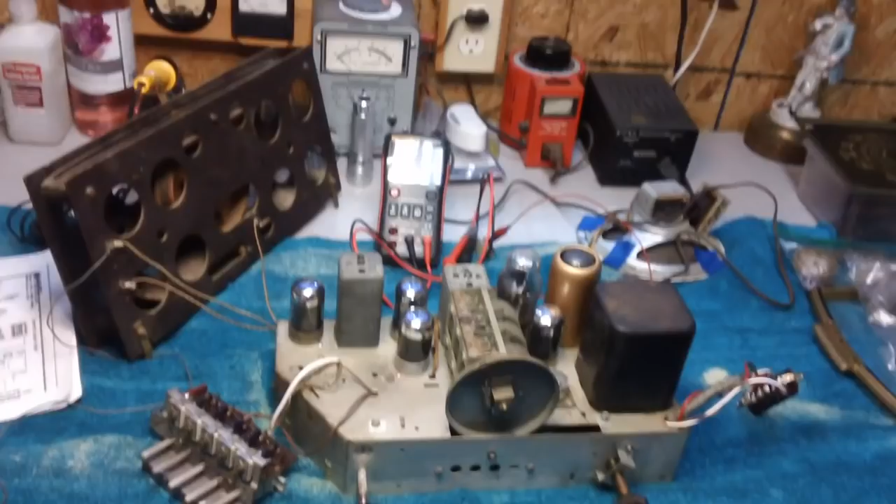Tell you what, just before we jump out into the garage, I'll give you a quick update on what's been going on with the Zenith. The radio does make sound now. It comes on. The problem is the sound is a motorboat, a mild to low motorboating. So after I get the axle out from under the Thunderbird, I'm going to take a few days and spend it strictly on the radio.

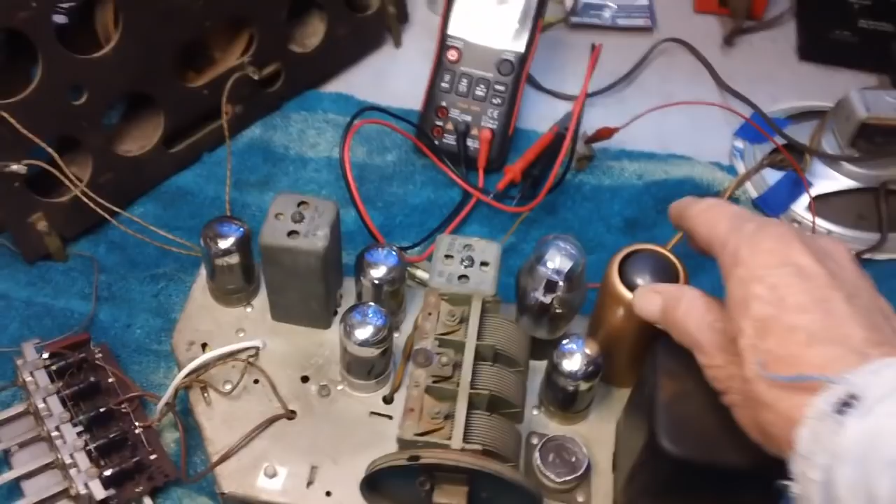This thing did not have an original Zenith tube shield, so I had to adapt one off of an Atwater Kent. Somebody would have mentioned that or caught that right away. Oh, that's not a Zenith. Yeah, well, I know these things, okay? Well, anyway, we're going to try to get this baby to make some really good sound before it's over.

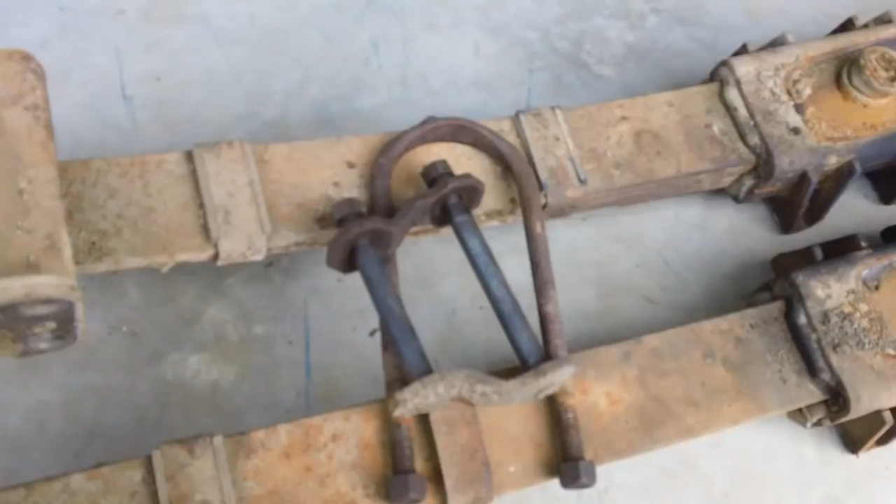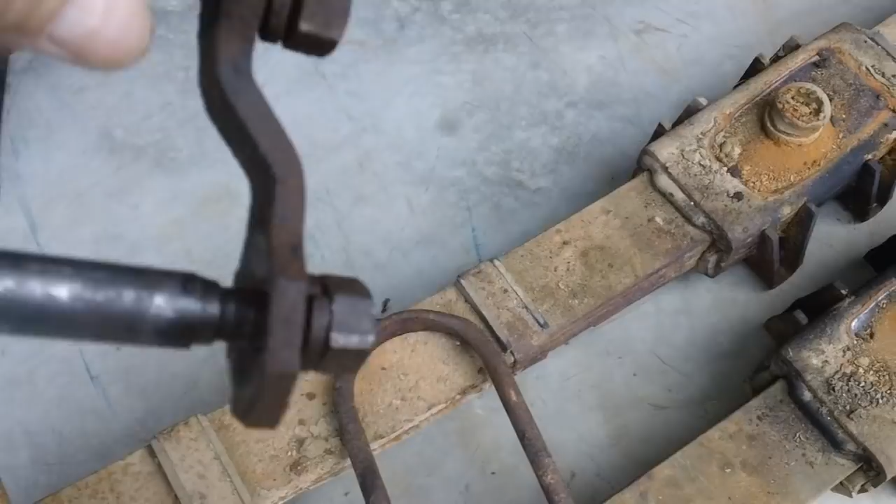A couple of more little items before we actually get going. This is the shackle that's on the rear, the very end of the leaf spring on the loop right there. One on each end of the car. And you'll notice that that thing is supposed to slip over there real nice and be floppy loose, that bar. Well, the other one's not quite like that. Let me show you. Here's the other one. Bent out. And I can't get the bar or the strap to go across.

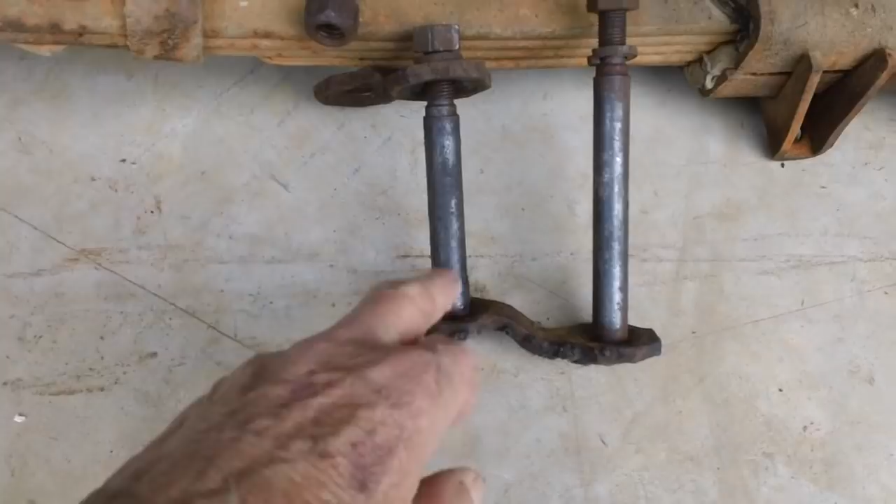So I'm going to have to take it into the shop where I used to work, ask one of our maintenance guys if he can put it in the vise and straighten it out. I don't think it'll take too much. I think it's nice and sturdy. I mean, there's no rust, no pitting, none of that other garbage on there. I don't think it's the bar. It might be. We'll have to determine that once I get it in there.

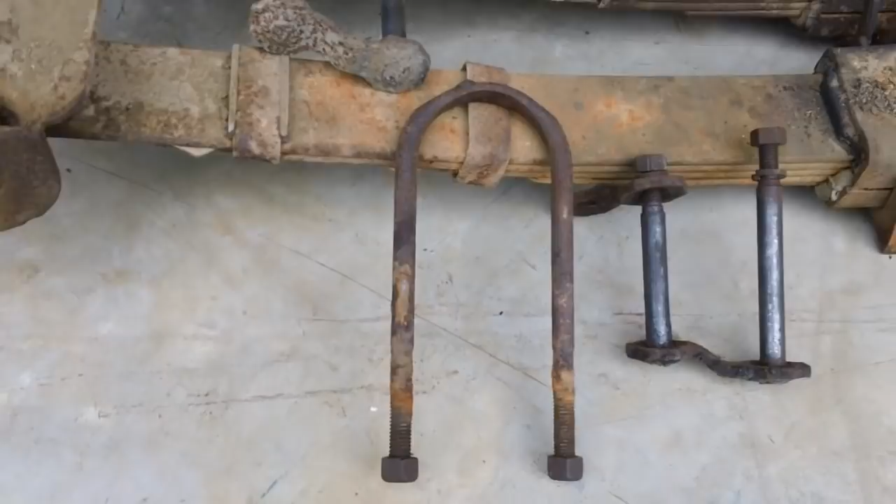Also, for you guys who have Thunderbirds, 1966s, this is the spring clip or the U-bolt. This is 8 inches from the bottom of the bolt up to the inside of the top right here, if you have an original like this. On this car, it's 8 inches, and then it's 3 inches inside surface to inside surface. And the rod that it's made out of is 1/2 inch. So we have 1/2 inch, then we have 3 inches, and then 8 inches. And I'll show you later on where those dimensions will come in handy.

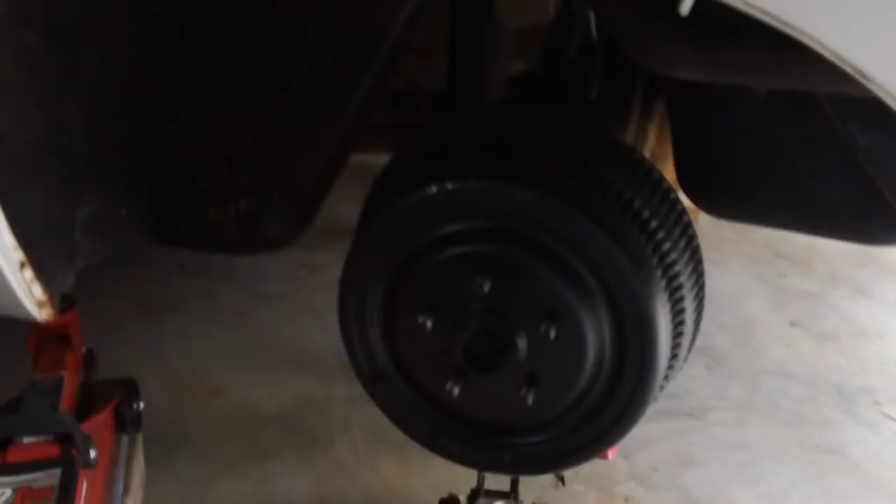Here's the plan of attack. The first thing you have to do is disconnect your emergency brake cables that come into the rear of the brakes. They've got to come out. If I'd have known I was going to pull out the leaf springs this early, I would have never hooked them up. But I'll have to pull the drums, disconnect the emergency brake cable, and let it dangle on both sides.

Then I have to disconnect the drive shaft. The drive shaft has to be disconnected. And then the shocks. There's a shock on each side that also has to be disconnected. Then we're going to lower it down. We're going to lower this one down and then go over there and lower that one down a little bit. We're going to do it evenly back and forth. I'm not just going to let it come down.

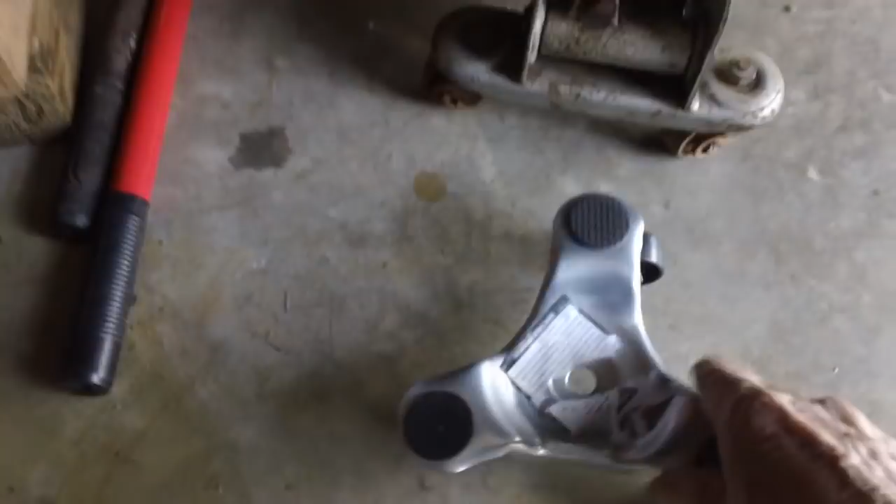We're going to lower it down on these little dollies that I bought. These mover dollies capable of holding 300 pounds apiece. I'll put a little pad in there like so. And we're going to let that thing just come right on down and sit right in that gully right there between those things.

And then if all goes well, if that large round gear section of the axle, you know, the gear housing, if it clears the gas tank in the bottom of the car, we'll just wheel it right on out. If it doesn't, we'll have to pull it out this way. One way or another, that axle is coming out of there today.

Well, already I've run into a small problem I hadn't noticed before. The mufflers on this car are on the back, all the way to the rear. You've seen them. And the tailpipe runs over the top of the axle and then goes up to the front of the car. Comes around, runs over the top of the axle, and runs up. But unfortunately, I've never seen this before, but it runs at an angle like that. Okay? They don't go straight up like they should. After it clears the axle, they go at an angle like so.

Sitting on top of that mess is our drive shaft. It comes down like so from the tail shaft on the transmission, and it hooks to the rear end right here. So unfortunately, with these tailpipes running at an angle, once I disconnect the drive shaft from the rear end, I can't just drop it down. So what I'm going to have to do, you may run into this yourself.

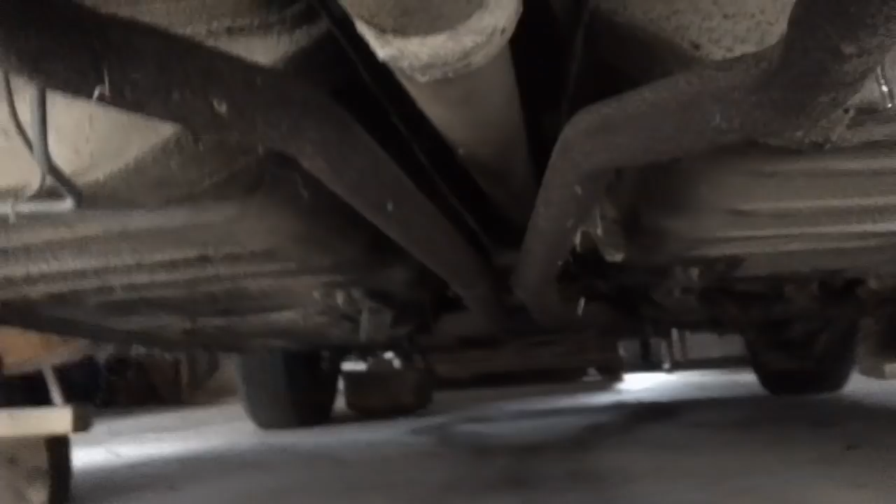I hope you can see that. See where the 2 pipes go at an angle together, and the drive shaft is sitting on top? All I can do is drop it down and it hits those pipes. That's kind of weird, but that's the way it is. I guess they wanted to clear the floorboards. So we're going to go ahead and disconnect these bolts right here. Shove that baby forward. Hopefully we'll knock off that mud wasp nest while we're at it.

I'll tell you what, it's supposed to be 62 out here today, but it sure is windy too. Didn't say anything about that, or at least I didn't see it. Woo!

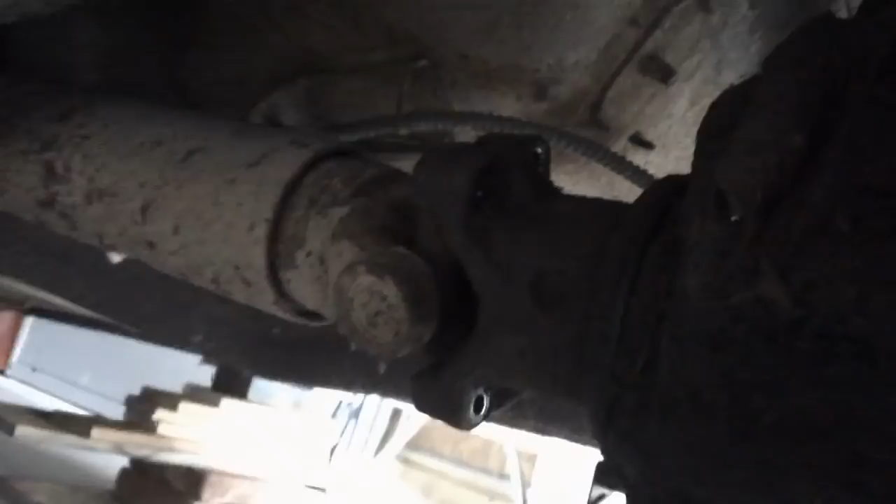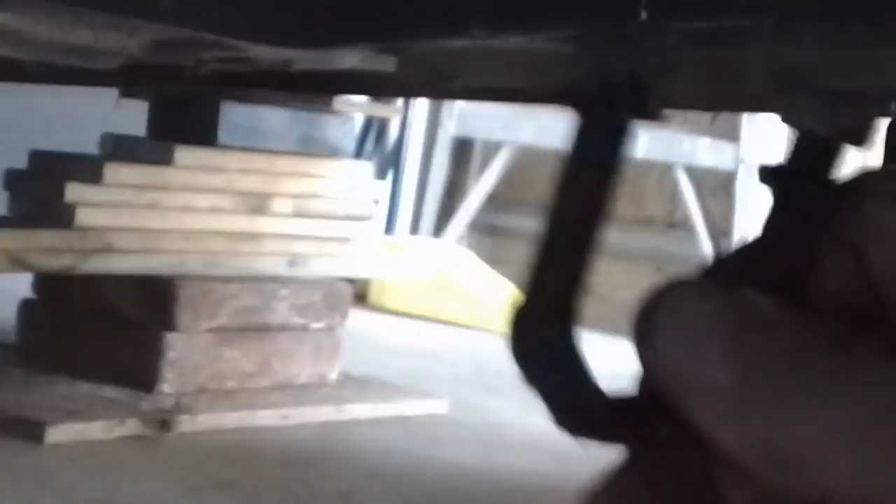For those of you who have an interest, these are the 2 holes. There's one here, one on the other side, and then there's these 2 here. Let me see if I can zoom in. Yep, there's a top hole set and a bottom hole set. The U-bolts came out from the bottom set. Where the heck am I? I lost it. There we go. They're just held in with a nut and a lock washer. 1/2 inch, by the way. They usually come loose pretty easily, and these did.

So now the only thing holding that drive shaft in there is these things right here. These are the caps for the bearings, and what I need to do is get this thing out of there and shoved forward so it'll clear the pumpkin. So how do I do that? Well, we take a screwdriver, run it up in there, and just kind of pry it back like that while I'm holding it with the other hand. And don't get underneath these things. Some of them are very heavy. Most of them are pretty light, but some weigh a ton. So you got to be careful.

You know, if it decides it wants to drop, well, let it drop. So what? We can always get a brand new set of bearings and a brand new universal joint, all that stuff. Don't worry about it. I'll probably have to wind up putting new universal joints in this anyway. They don't cost that much. So let me see if I can clear this thing from the pumpkin and then shove the whole thing forward enough to clear it.

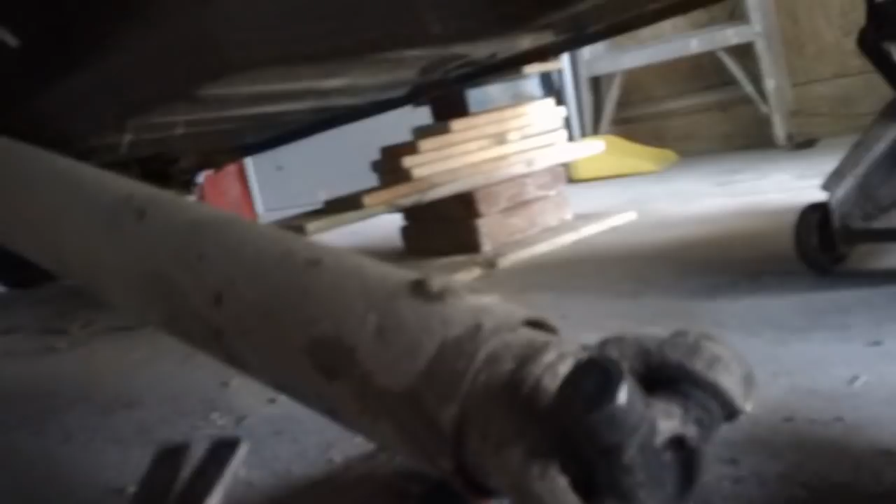Alright, she's dropped down. It cleared, it went forward about 1.5 inches actually. And I've got it sitting on the ground. It actually came on down through. What it did was the weight of the drive shaft split the pipes apart. I was worried about them damaging the pipe if that were to happen.

Eventually, if I ever get this car on the road again, I want to drive it down to the muffler shop and have brand new pipes and mufflers put on it from front to rear. I don't want to be driving around town with, you know, tremendous muffler sounds. Every cop in town would stop me. But anyway, there she sits at the end of the drive shaft.

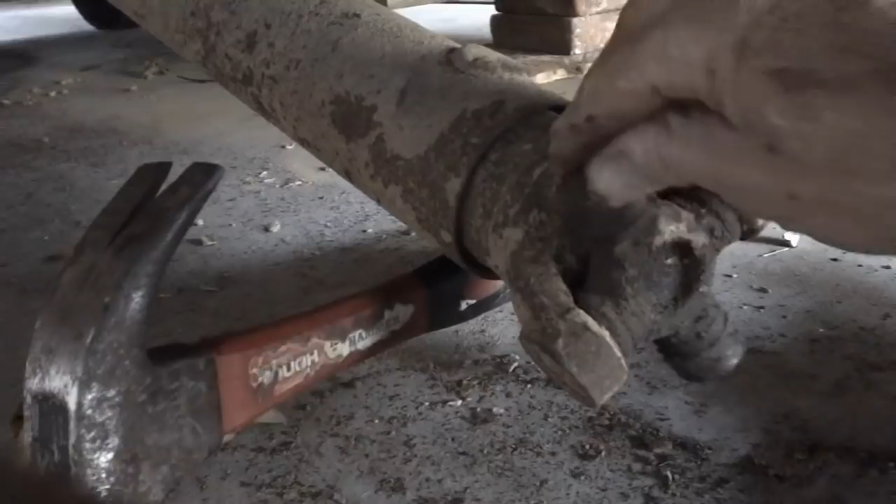Let me see, I'm wiggling kind of hard under here, but this is your universal joint right here. Okay, these bearings here turn. These feel pretty good actually. And the ones on the bottom also turn nice and smooth, and this right here feels pretty good too, but I don't know. I'm not about to keep those. I'm going to go ahead and get rid of them. They don't cost that much, like I said.

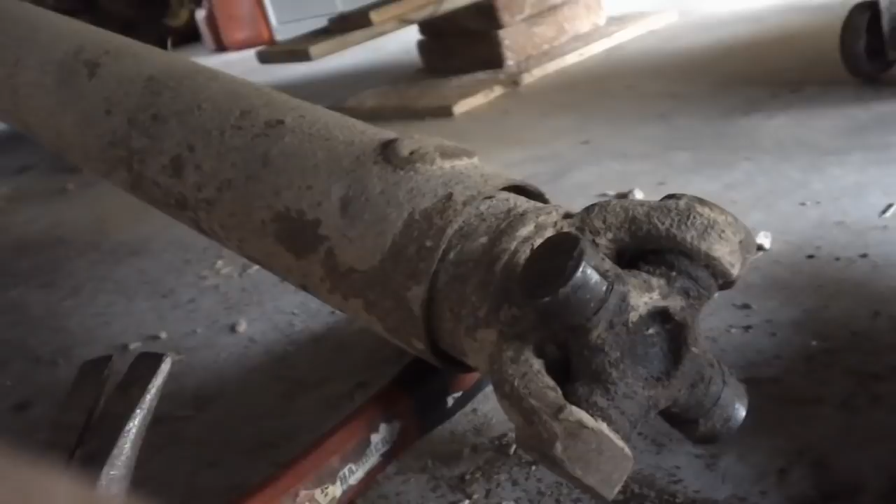You know, I've never seen a drive shaft where one was inside of another. I've seen 2-piece and even 3-piece, I think. But I've never seen one where it was inside of one another. That's kind of strange.

But anyway, these are your universals. These caps will actually pull off, and underneath there's a whole set of needle bearings all the way around the outside edge in all 4 of them. And you can usually feel a lot of grit, or they just hardly turn at all when the needle bearings are messed up. These feel pretty good. Alright, let's go on to the next step.

One more aspect about safety. I hate to keep harping on this, but we're dealing with parts right now that are extremely heavy. This is not your lightweight muffler or something like that. Yes, the car is still secure. I've got it on 4 jack stands and 2 sets of boards. That's 6 things holding it up. It's a lot lighter now with the springs out of there.

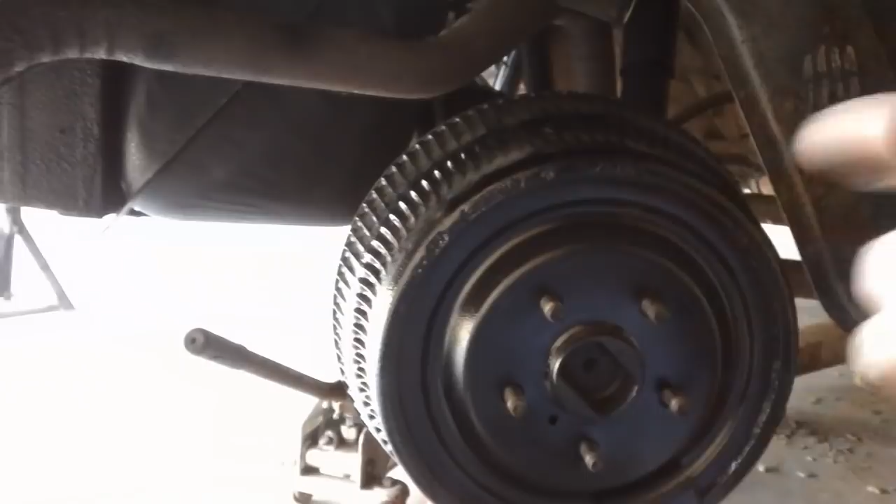But once you start disconnecting the rear axle, you drop the drive shaft, and you pull off the brake lines. The other side's already done. I got the emergency brake line. I'm going to do this side. Keep this in mind. Once you start disconnecting this thing from the car, it is freewheeling. It is no longer part of the car. So no matter how much support you have on the car, it does not matter to the axle.

Watch. Now I've got all this stuff holding the car up. Now watch this axle, see? See how she swings back and forth? She's being suspended right now by the shocks only. And if it were to fall, let it fall. Don't get underneath it, okay?

Do not get under anything that moves like this, all right? I don't care how much stuff you got underneath it. It could fall. If it falls, don't worry about it. Let it fall. You can always get a replacement axle. You cannot get a replacement you. If it moves, stay out from under it.

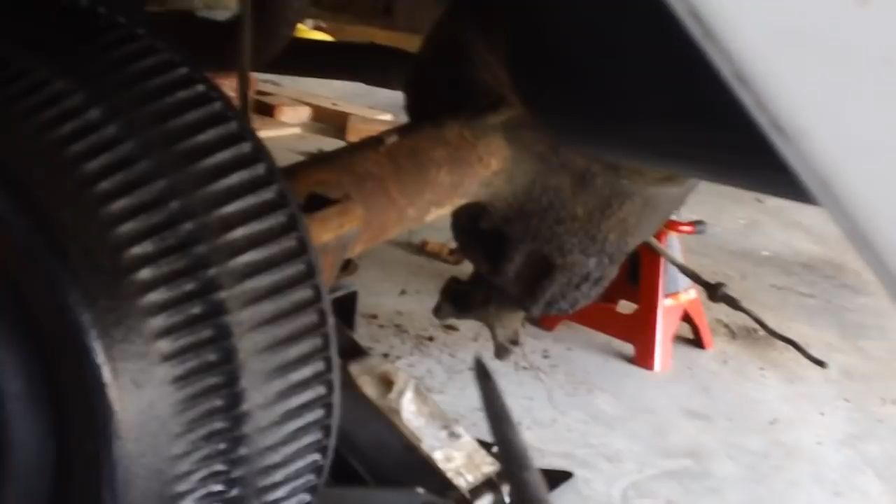Well, as you can see, once I released the shock on this side, it all rolled forward, just like I said it would in the last video. Matter of fact, it rolled so far forward and so fast that it actually took it right off the jack stand. So that's why you don't stay under it.

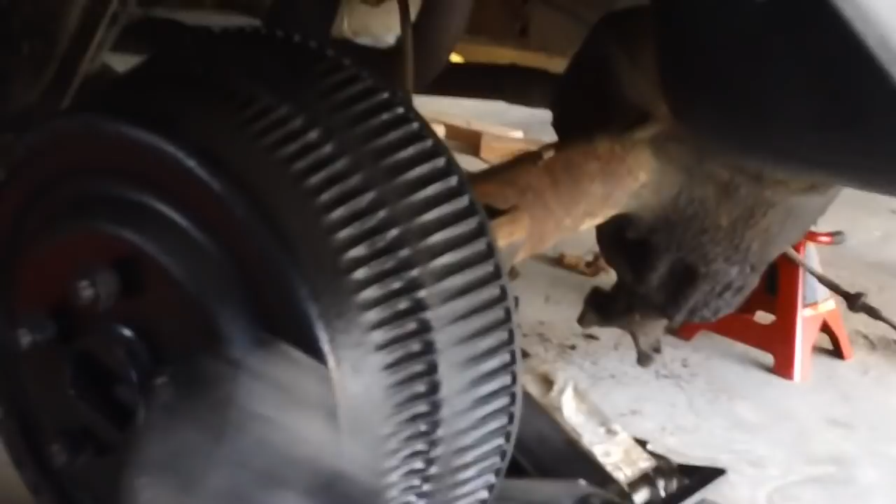It fell down off the jack stand, it hit the concrete, so what? Who cares? I got it jacked up right now again by the axle and with the little jack. And I've got my little dolly wheel under there with the cloth under it. And we're about to find out if my grand scheme, at least on this side, is going to work.

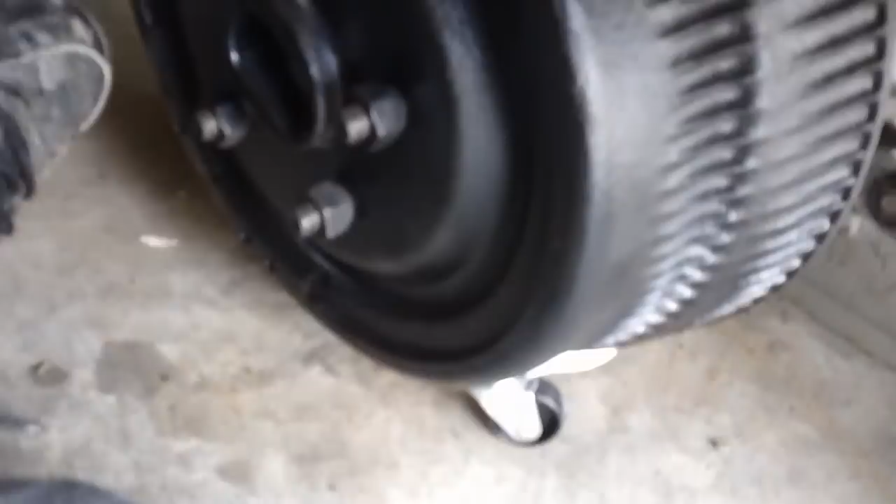Here we go. I positioned it, by the way, with the 2 rear wheels here and the single wheel there and this ridge right between them. So, will that work? I don't know. I may have to reposition them. Well, so far so good. Let's see what happens here. Oh, son of a gun, she might just do it. Once I get it down level, let's do the other side.

Well, there it is, all out. Now, my brilliant idea about using those mover dolly wheels, it was a great idea. The problem was, it didn't work. So I had to go back to plan B and just roll it out on the hubs. That's what I did. Of course, it scuffed up the paint a little bit on the inside edge there. But it didn't matter. They're all out now.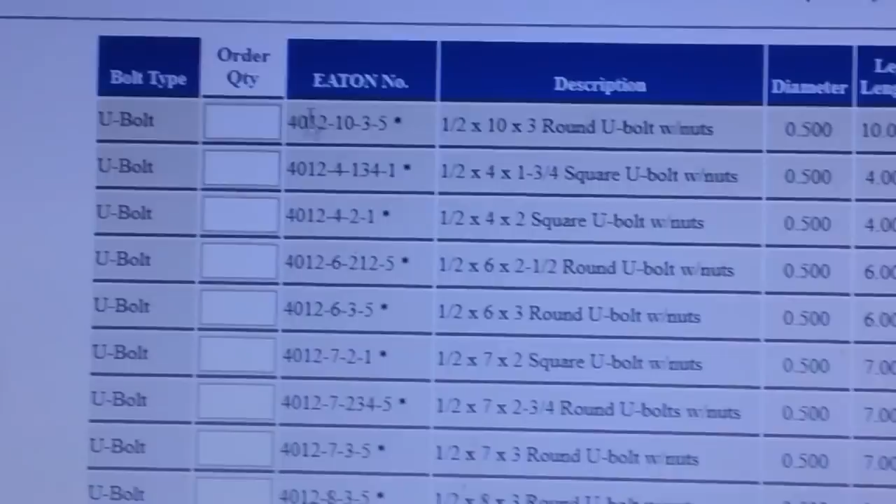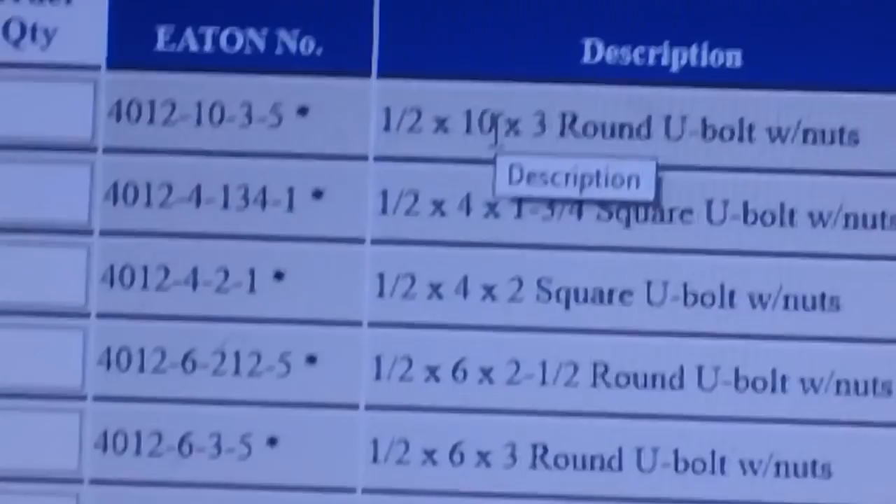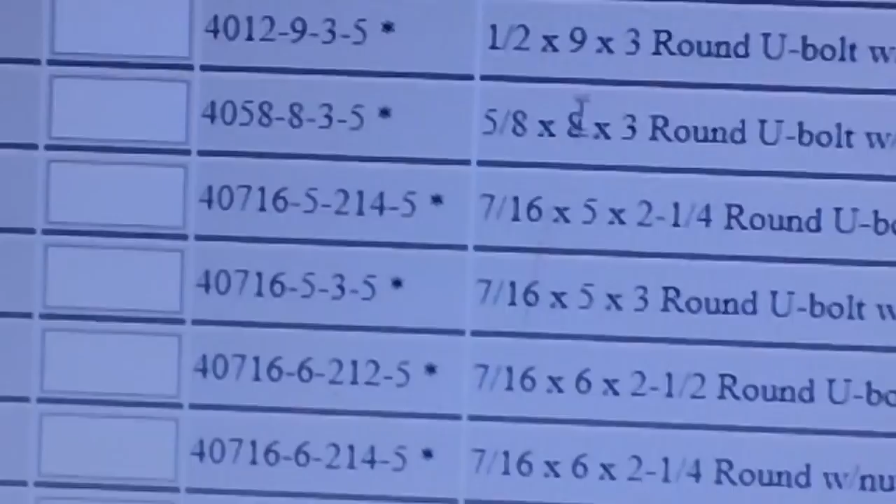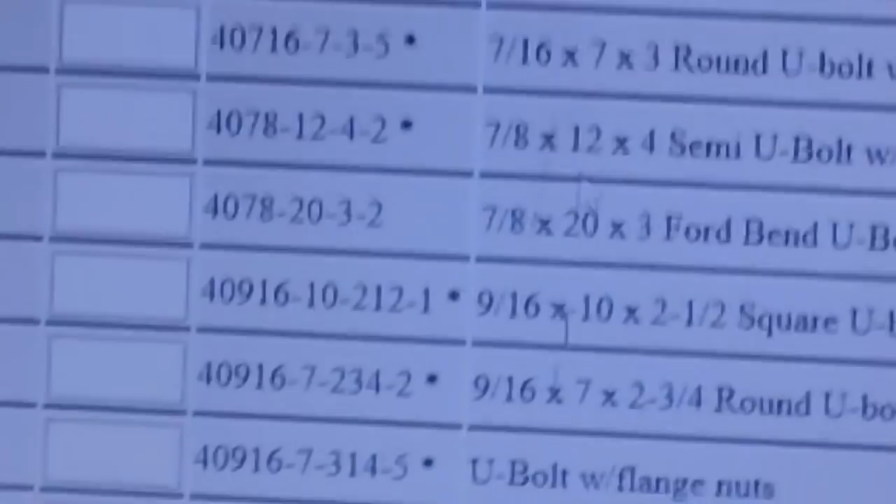So I'm looking for 3 by 8, or actually a 1/2 by 8 by 3. So let's go down our little list here. Let me zoom in. Let's look for an 8. There's 1/2 by 8 by 3 right there. And as you'll notice, there's no other. Well, here's a 5/8 by 8. That's not it. Going down there. There's a 9/16 by 8. That's not it. We're a 1/2 by 8 by 3, and right there. Where did she go? Right there.

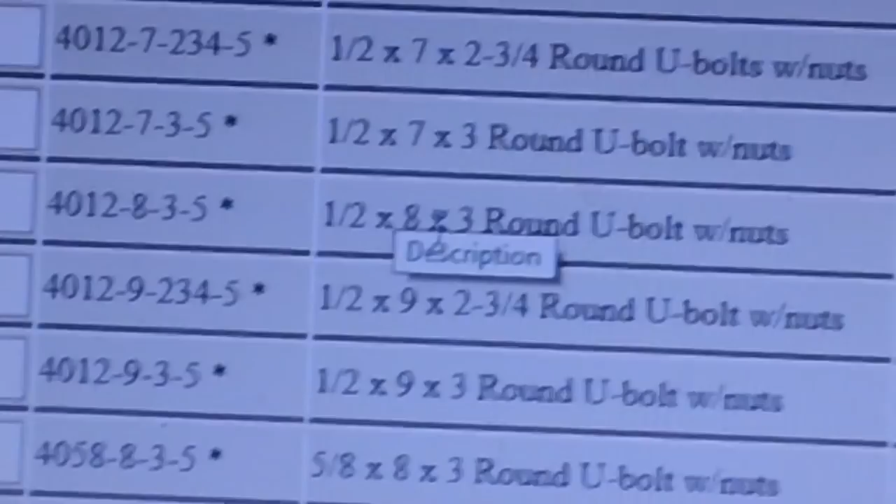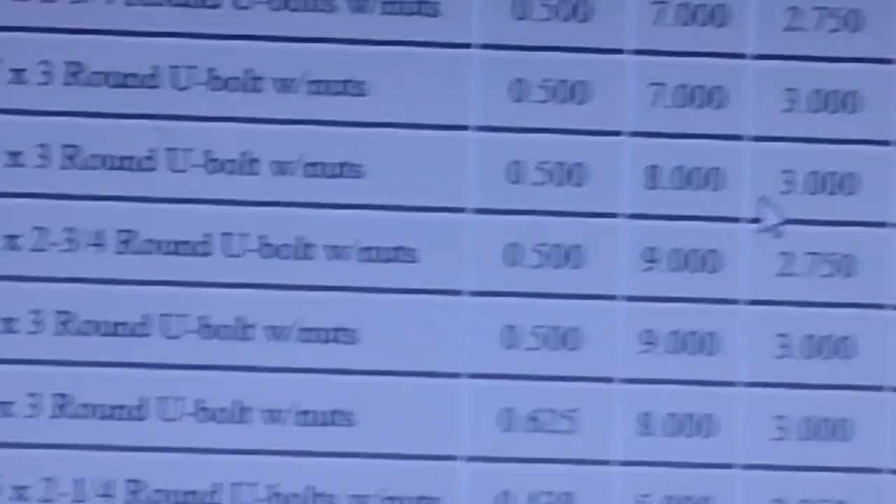1/2. Where am I here? Okay, here we are. 1/2 by 8 by 3. Round U-bolt with nuts that come in it. Those are flange nuts that tighten up on their own. This is a 1/2 inch, 0.50 by 8 by 3. They're going to cost me $11.25 a piece. So that's $11.25 times 4. Small price to pay to keep the rear end in the car.